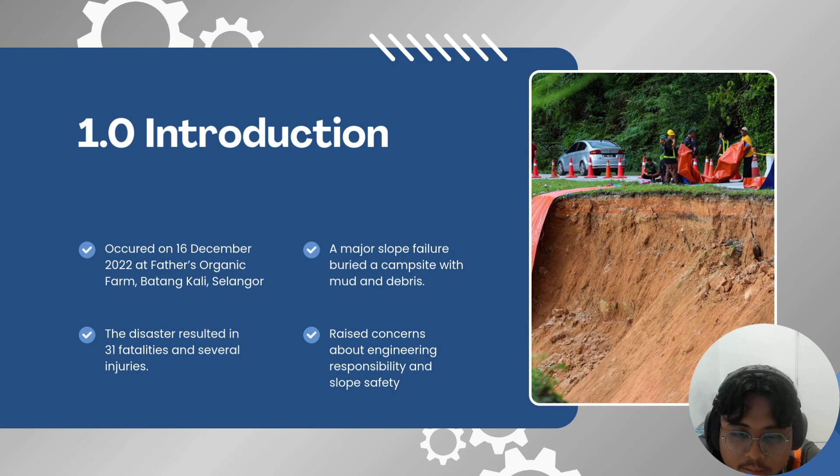I will be presenting the background of study for the Batang Kali incident. So, the Batang Kali incident happened on 16 December 2022 at Father's Organic Farm in Batang Kali, Selangor. It was a recreational farm, and the three affected camping zones are Hillview, Farmview, and Riverside. From the geological context, the landslide type was retrogressive slope failure.

As we go further, we can see that it's the cumulative rainfall which later increased the soil saturation, also the pore water pressure, and resulted in rapid debris flow that buried the campsite. So, from this incident, we have experienced 31 casualties.

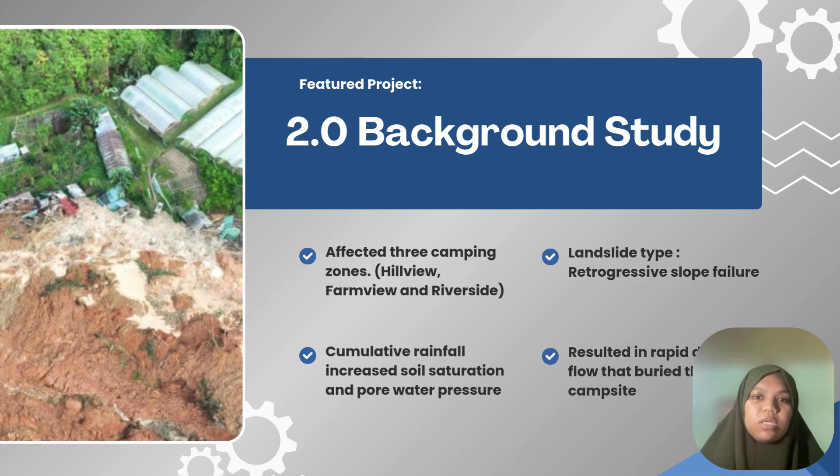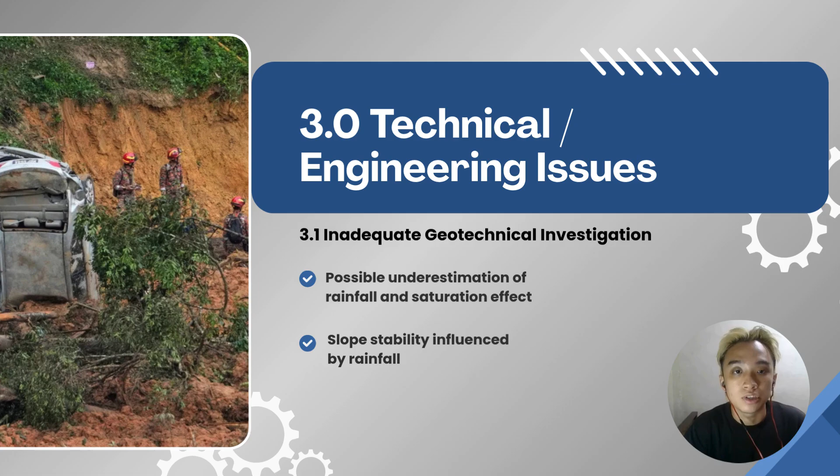For this section, we'll discuss the technical and engineering failures that may have contributed to the Batang Kali landslide. The first technical issue is inadequate geotechnical investigation. It is possible that the effects of rainfall and soil saturation were underestimated during the slope assessment. In tropical regions like Malaysia, prolonged rainfall can significantly influence slope stability by increasing the moisture content of the soil.

The second issue relates to drainage and pore water pressure. Continuous rainfall increases soil saturation, which causes pore water pressure within the soil to rise. When pore water pressure increases, it leads to a reduction in effective stress and soil shear strength, which weakens the internal structure of the slope.

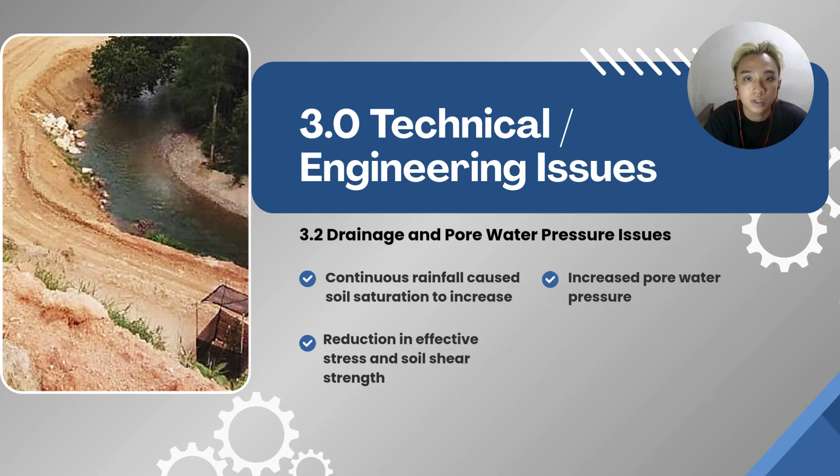The third issue is lack of monitoring and risk management. In slope engineering, slopes require continuous monitoring and inspection, especially in areas exposed to heavy rainfall. Engineers typically look for early warning signs such as tension cracks, minor soil movement, or blocked drainage systems, which may indicate developing instability. In this incident, the campsite was located directly below a potentially unstable slope, which significantly increased the level of risk.

In this next section, we'll talk about the ethical reasons for failure. The first ethical issue is the duty to protect public safety. In engineering practice, public safety must always be the top priority. Engineers are responsible for ensuring that their designs and decisions do not endanger human life.

The second ethical issue was the lack of professional skill and due care. Engineers are expected to apply appropriate engineering standards and professional judgment in their work. This includes considering environmental factors such as heavy rainfall patterns, which are known to significantly affect slope stability in Malaysia.

The third ethical issue is accountability and supervision. According to the Registration of Engineers Act 1967, only registered professional engineers are allowed to approve engineering works. This ensures that engineering projects are designed and supervised according to professional standards.

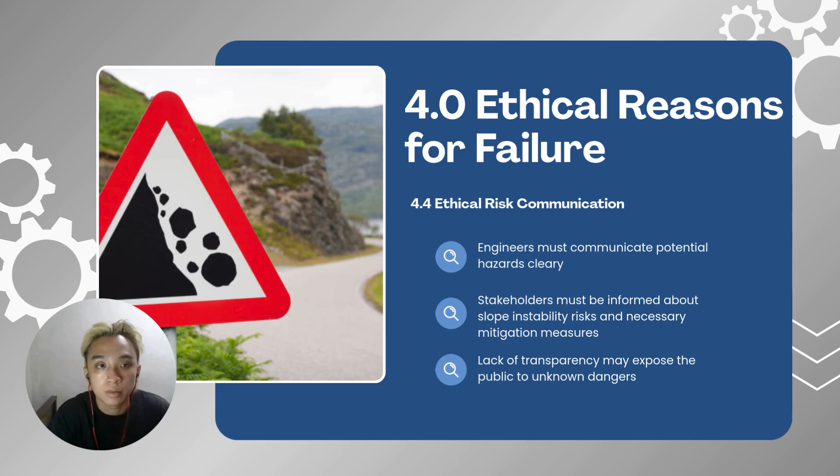The final ethical issue is risk communication. Engineers have the responsibility to communicate potential hazards clearly to stakeholders and authorities. Stakeholders should be informed about slope instability risks and the necessary mitigation measures so that appropriate actions can be taken.

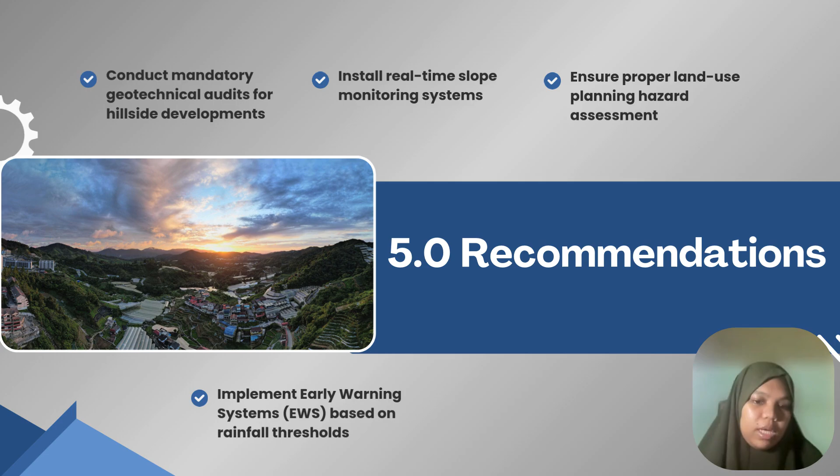So, our recommendation to prevent incidents like Batang Kali from happening again is that we can conduct mandatory geotechnical audits for hillside developments. With this, we can track on the spot the condition of the hillside developments. We can also install real-time slope monitoring systems and ensure proper land use planning and hazard assessment, and lastly, we can also implement an early warning system (EWS) based on the rainfall threshold.

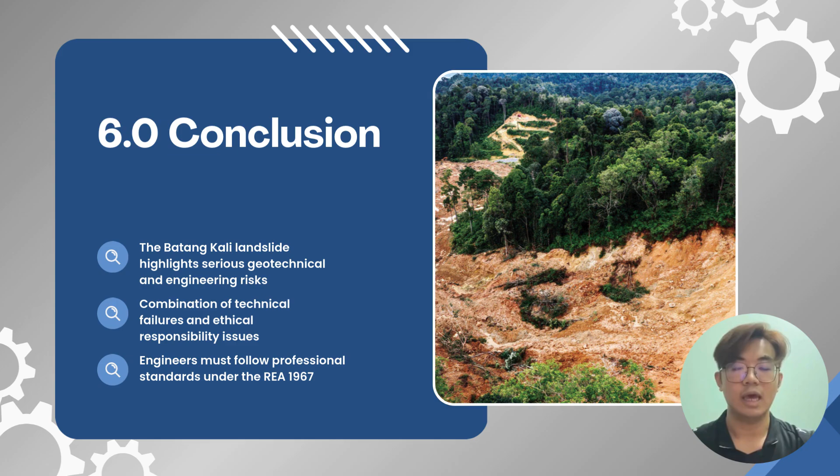In conclusion, the Batang Kali landslide showed the serious impact of geotechnical failure on public safety. The disaster occurred due to both natural factors and engineering weakness. Heavy rainfall increased pore water pressure and reduced the strength of the soil. At the same time, limited site investigation and poor slope management also contributed to the failure. This incident highlights the importance of strong engineering practice, ethical responsibilities, and continuous slope monitoring to prevent similar disasters in the future.